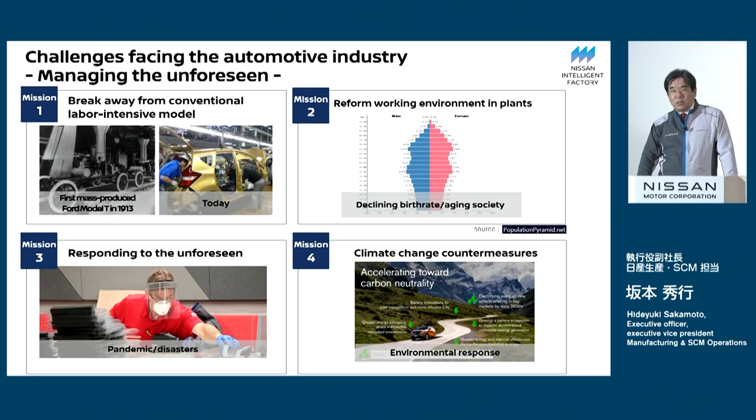And the last one, this is another important global challenge: CO2 emission or carbon neutrality. Fighting climate change is an area where we need to contribute. These are the conditions, and after we satisfy these four conditions, next page please.

We need to build our car production scheme for the next generation, adapted to the future: electrification, vehicle intelligence, and connectivity. Building cars is growing more complex and advanced. We are writing a lot of software all at the same time, doing calibration of different sensors, self-diagnosis, and fail-safe systems. These are the assurances we are providing. So car building is becoming even more complex and challenging.

If you look at batteries, big batteries with long autonomy, standard batteries, vehicle intelligence, hands-off sophisticated autonomous driving technologies, or standard driver assist technology like ADAS, there are different combinations of variations required to build cars. So in order to build more advanced and complex vehicles, we need to make the production scheme and production engineering more flexible. This will be the key success factor for Nissan in the future.

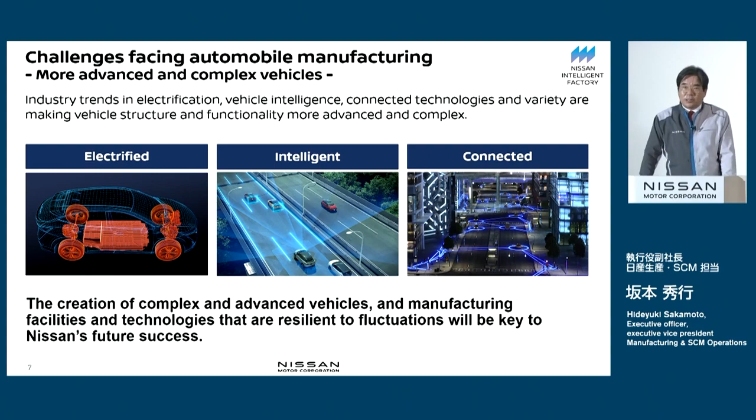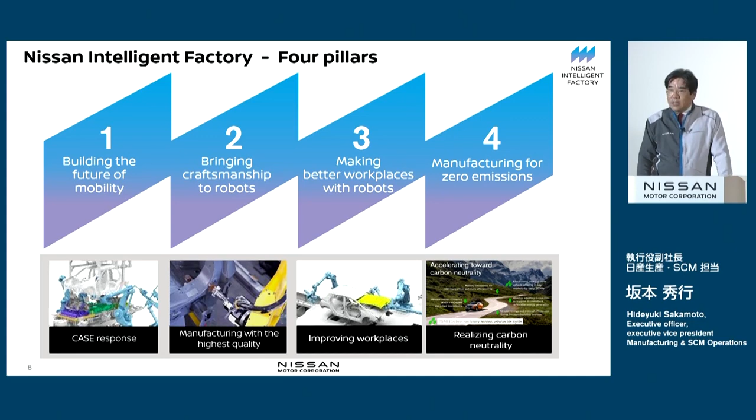That is why we have been creating this Nissan Intelligent Factory. These are the four pillars. Today, I will show you around the shop floor to provide you with the details. Next page, please.

In the introduction, carbon neutrality initiatives are what I would like to touch upon, which I had less opportunity to talk about in the past. Then we'll talk about the technological elements of Nissan Intelligent Factory, and Kikuchi-san will talk about the overview of the plant itself. Next page, please.

Carbon neutrality. Next page, please. Well, this is self-explanatory. Around the world, we are seeing global trends related to climate change. Many agreements and declarations are made. The Japanese government too declared to hit carbon neutrality by 2050.

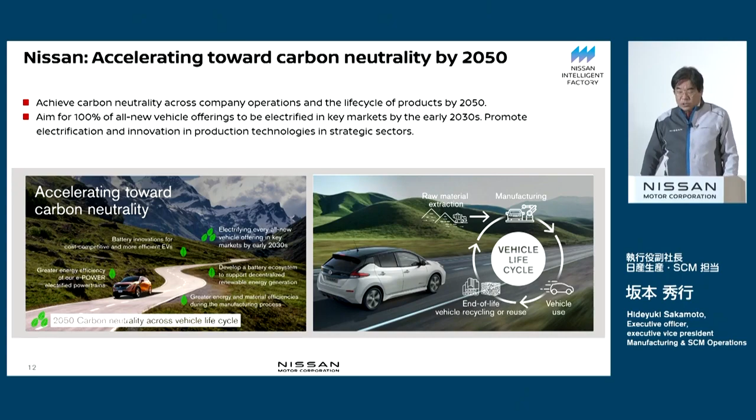Having said that, carbon neutrality initiatives are nothing new for us. We have been working on the Nissan Green Program to reduce CO2 emissions ahead of many people. In this Nissan Green Program in 2010, more than 10 years ago, the first generation mass-produced Nissan Leaf EV was introduced.

In the main market, the main category or main segment of the market, a C-segment hatchback mass-produced EV was introduced, offering an EV you can use every day. I was in charge of engineering at the time as a division general manager. Then we came up with e-Power.

This is about providing electric driving to help penetrate electrification in the market. That was why we introduced e-Power. At the time, I was heading the engineering and was fully involved in the development of this piece of technology. In order to build these electrified vehicles, by minimizing the consumption of energy, we minimize CO2 emissions. That's what we have been doing.

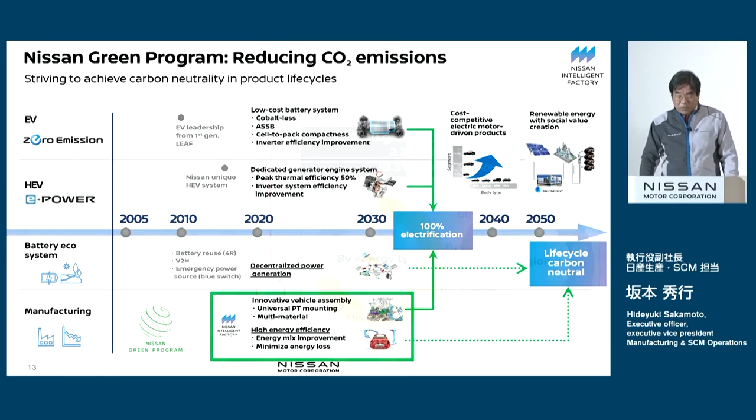And going forward, we are going to promote innovations to do more on this front. Nissan Green Program is about the CO2 emissions in manufacturing operations. How much have we reduced CO2 emissions? For long years we have been working on this, starting from 2005 to 2019. In order to build one car, we reduced 30% of the CO2 emission.

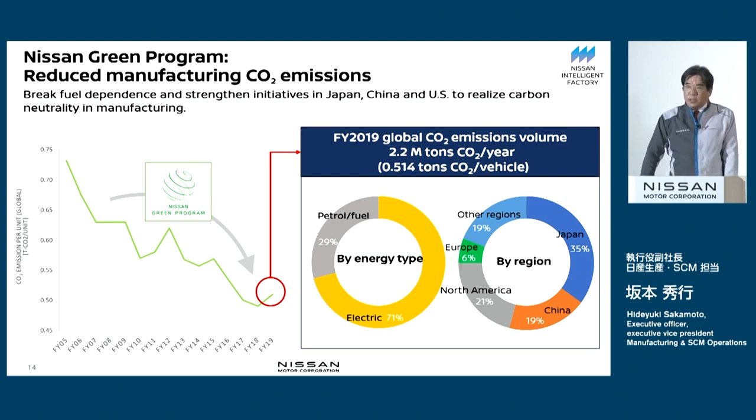This is already a track record. This is a result. As of today, 70% of energy consumed is electricity and gas, with fuel being the light oil, accounting for about 29%. We are going to nullify this consumption at the end of the day, and that's the mission of the manufacturing team.

Here you see how we are going to promote initiatives up till 2050, and this is the roadmap we created. In 2019, as of today, at the plant we have electricity. We use a compressor with high pressure air, shown as the blue line, to provide high pressure air to the plant. And for gas, we use a boiler to evaporate it into steam. This is how we operate the plant today.

In 2030, what will happen? We will largely reduce energy consumption. And on top of this, shown in pink, within the campus we plan green energy, carbon neutral power generation, where we plan to use the fuel cell. We would like to generate power with fuel cells and use green energy such as photovoltaic power generation and windmills. We will combine the renewable energies and expand the scope of the trial.

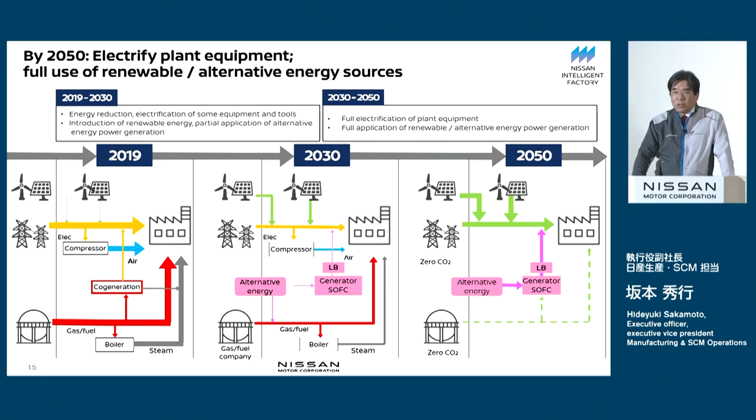Between 2030 and 2050, the basic production process of production equipment should be electrified, and the source of energy will be shifted to renewable energy and clean energy power generation. That's our aim. Next page, please.

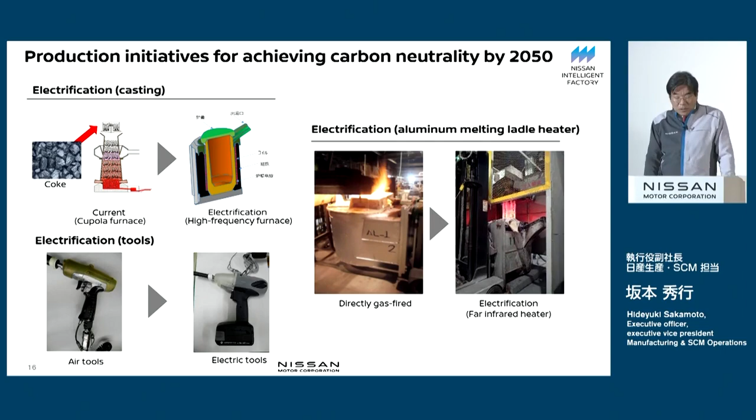As of today, at the UK Sunderland plant, we use wind power and solar power to generate a lot of electricity. And the other day, as we announced, a microgrid has been created, and clean energy will be applied to a wide area.

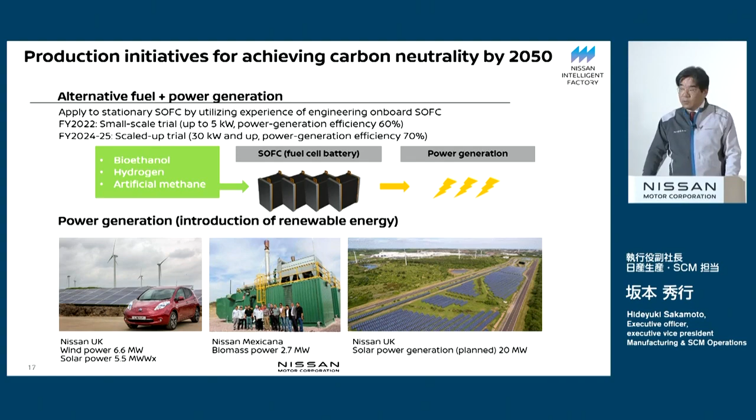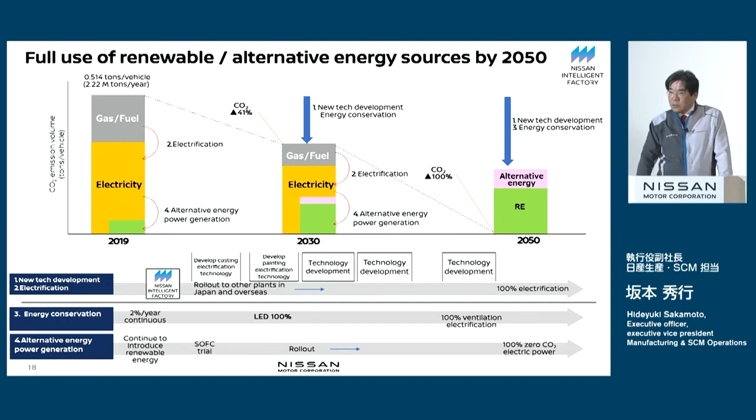This carbon neutral power generation, along with green energy procurement from outside, and fully electrified energy, will all be used in 2050. We will be fully carbon neutral. That's our intent. Based on this detailed roadmap, the R&D and production engineering teams are working to make it a reality. Moving on to the next one. That was all from me.

I touched upon the carbon neutrality initiatives. Next is about the Nissan Intelligent Factory system components and the new technologies that are used. CVP Hirata-san, in charge of this engineering, will be speaking. Thank you for your attention.

Good morning, ladies and gentlemen. I'm in charge of vehicle production engineering. My name is Hirata, nice to meet you. Let me take this opportunity to talk about how we will build cars for the next generation with Nissan Intelligent Factory, and show you how the cars will change over time. Excuse me, let me take off my mask. And how the production line will be updated with new technologies.

I will specifically show you photos of the equipment used in this Nissan Intelligent Factory. On the 28th of November 2019, Nissan Intelligent Factory Tochigi was used as a pilot, and we are going to deploy it globally - that's what we announced. This Nissan Intelligent Factory in Tochigi will be producing the next generation battery EV, the Nissan Ariya.

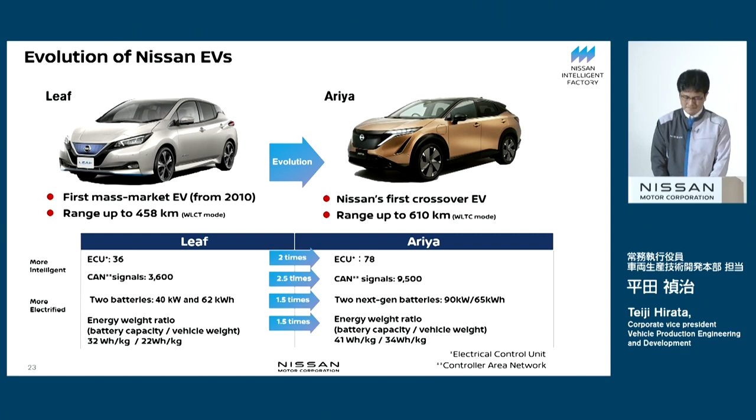On top of this, it's more intelligent and more electrified. The number of ECU, electrical control unit, is double the number of first generation Nissan Leaf, and the number of signals is 2.5 times. Two types of battery have an output, and the energy weight ratio is 1.5 times, so it's largely updated from the Nissan Leaf.

Now, let me talk about the 4 pillars of Nissan Intelligent Factory from the 3 perspectives by providing specific examples of technology. One is Nissan's DNA in the all-new Ariya.

This is Nissan's DNA in the all-new Ariya. We newly developed a platform for EV, and thanks to the platform, we have outstanding quietness and lounge-like interior, stylish and low center of gravity with high visibility, which are very functional. Four types of powertrain, a wide color variation, and highly intelligent electric control unit are the representative examples of Nissan's DNA in Ariya.

Now, in order to make this a reality, what kind of production technology did we use? One is SUMO, the simultaneous underfloor mounting operation. With one equipment, we can build multiple powertrain components in a batch mounted from one single pallet.

Today, we have several processes with labor-intensive work. As you can see, the operators have to work in such a hard position, and we fully automate this universal mounting in a single process.

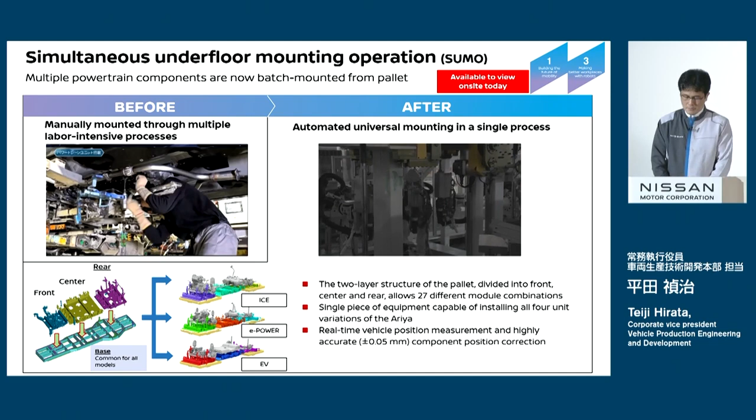The real-time vehicle position measurement enables a highly accurate component position correction. This big and heavy powertrain unit is mounted in a single process, and we call it SUMO, simultaneous underfloor mounting operation.

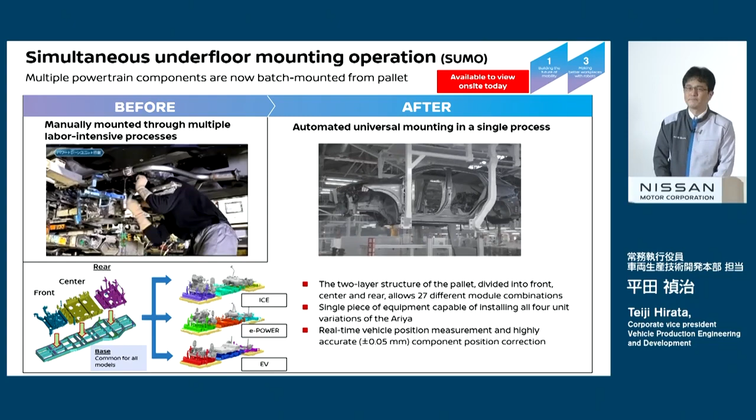Next is the automated tightening and alignment of suspension links. Here again, it used to consist of several processes with manual operation, which was high workload. It was complex and required high skills. But here again, we introduce a single process with automated alignment adjustment.

High load work requiring high torque tightening has been fully automated. An adjustment by robot with an accuracy of 0.1 degree ensures alignment that exceeds the Takumi Master Craftsman precision. As a result, driving comfort and stability are ensured on the EVs that we produce.

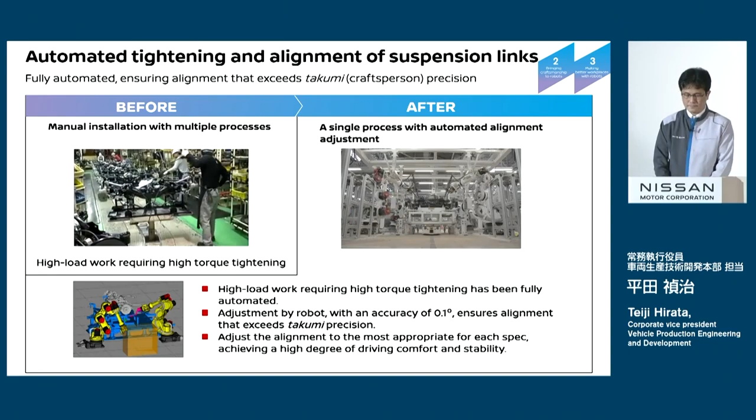Next is automation of headliner installation. Headliner is the component on the ceiling of the car. In the past, operators had to come into the cabin to install the headliner, so it was very hard to do this. With the vehicle intelligence and connectivity devices added, the weight increased by 4 kilograms from the traditional car. This installation is now fully automated by robots.

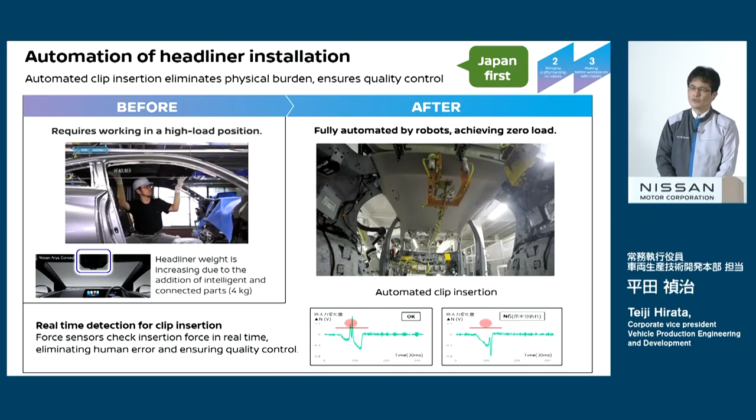This component is not tightened with a bolt. We insert a clip instead. Today, operators have to check that the clips are inserted fully using their fingers to feel it. But we added a sensor on the robot so that on a real-time basis, we can monitor the status, and once the clip is inserted fully, the work is complete.

Next is the automated cockpit module installation. Here again, we used to have 2 Takumi operators controlling the variations and left and right differences in this installation process. In the new process, we reproduce these high skills of Takumi master craftsmanship in robots. A high-speed vision system precisely measures dimensions, calculates the optimal center point in real time, and assembles the cockpit module for a well-proportioned and seamless cockpit.

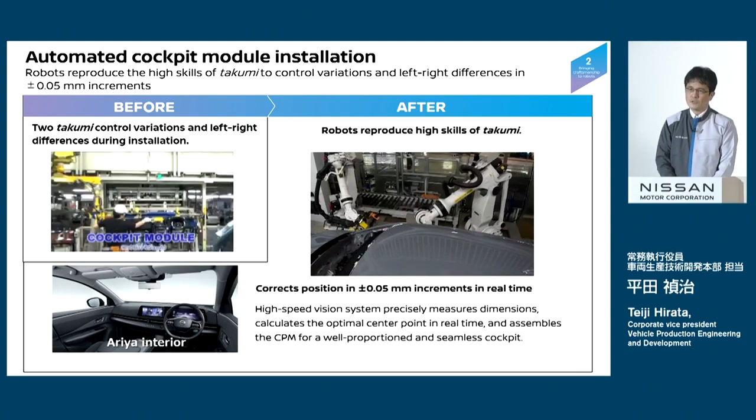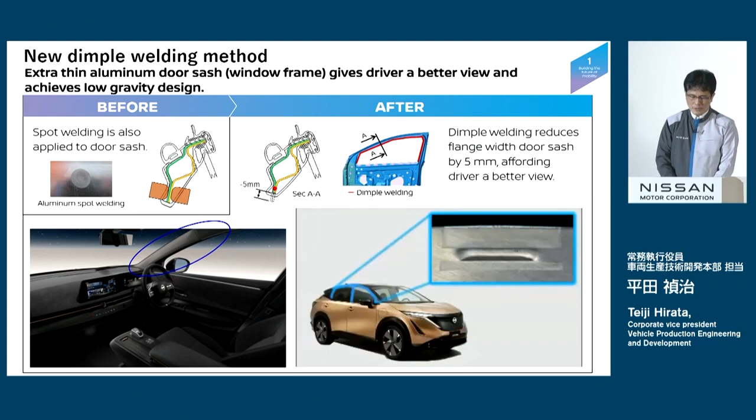Next is the new dimple welding method. All-new Ariya uses an aluminum-made door. In the traditional aluminum door, the door sash requires spot welding like a steel door. However, the area of the electrode should be added on the panel to make this happen.

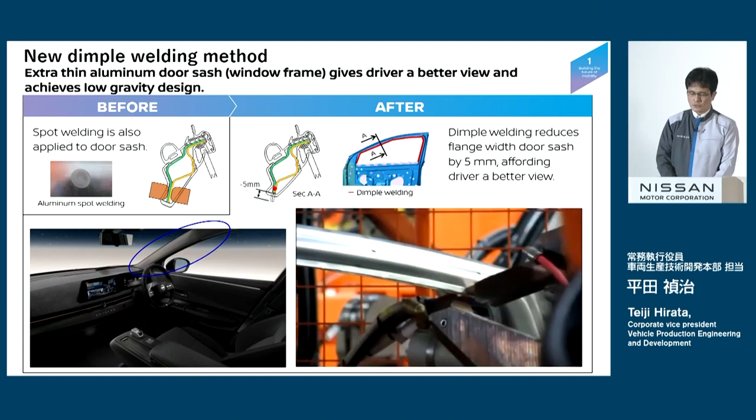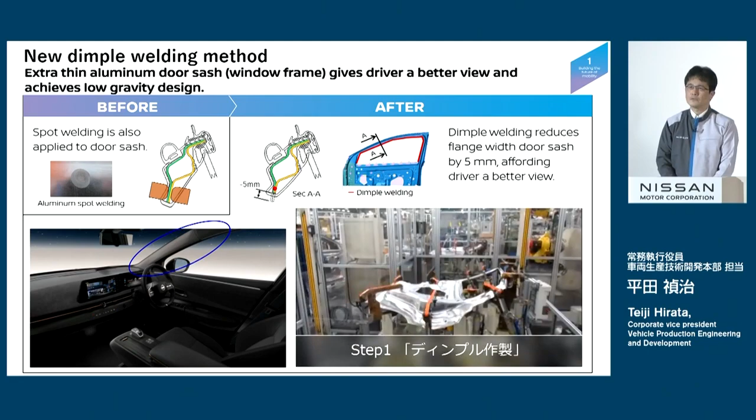But by applying this new dimple, which is a thin dimple that is stamped, the electrodes can be made smaller in size. As a result, we can reduce the front pillar width by 5 millimeters and increase the visibility for the driver.

Next is electrical systems responding to increasing vehicle intelligence. As Sakamoto-san mentioned earlier, depending on the specifications of the cars, we write the software at the plant for the ECU. The number of units largely increased from the traditional car in all-new Ariya, and the volume of data to be written is much larger than the traditional car.

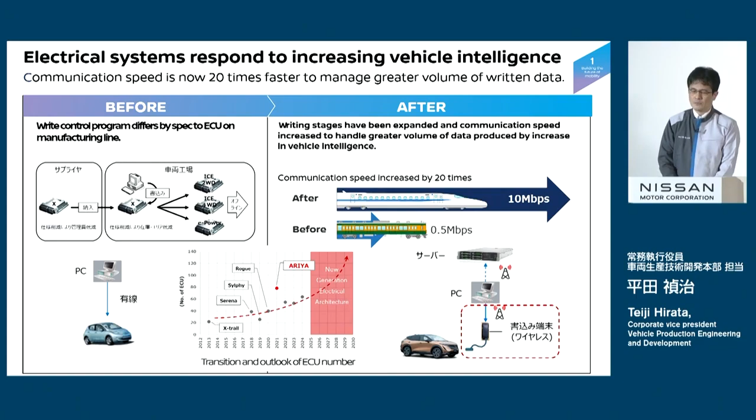In order to respond to this, we introduced a communication speed which is 20 times faster. And today you do the communication with the wire system, but now we are applying the wireless device instead.

Next is the core of the EV, the motor production process. In the traditional EV and e-power motor, we use rare earth materials, a permanent magnet inserted in the rotor. But with the all-new Ariya, this is the first mass production vehicle where we use an 8-pole wound field synchronous motor. To mass produce this wound field motor, high speed, high precision, and high density winding technology is required.

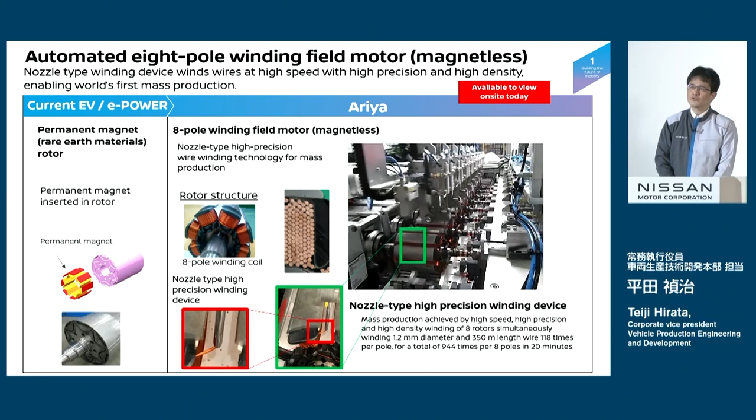Like the needle of an injection, there is a 1.2 millimeter, 350 meter coil. It is wound 118 times per pole, for a total of 944 times per 8 poles, in 20 minutes. That's the equipment that we introduced.

Next is automated paint inspection. Today, in the paint shop, we detect foreign objects on the surface with human eyes. But by using image processing equipment, in addition to the foreign objects we identify, we also identify 6 other faults which were unseen with human eyes.

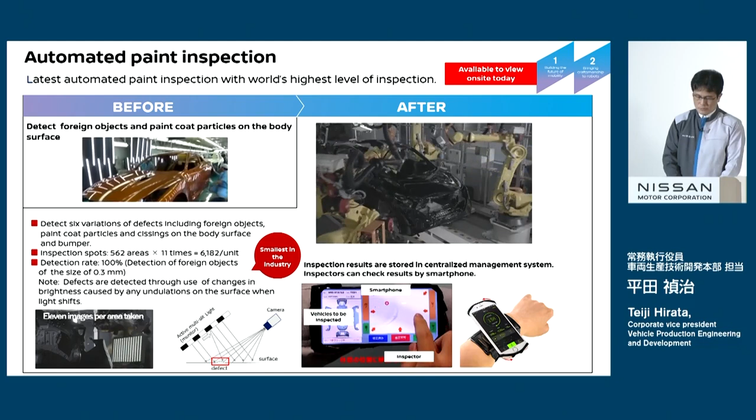As you can see on the bottom left, an LED light slit is reflected on the surface of the vehicle, and by shifting this light, we see the undulations of the light and the differences in brightness. So we can see the undulations or unevenness on the surface to identify faults unseen by human eyes. Compared with the traditional scheme, we can detect foreign objects of 0.3 millimeters in size, which is the most precise in the industry.

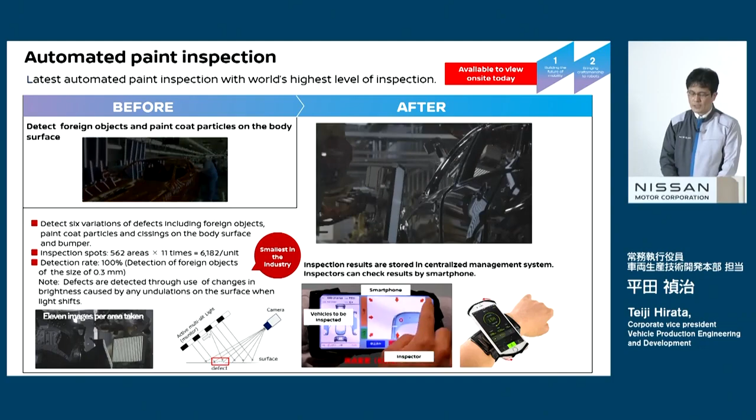The findings of the inspection are stored at the centralized control center, and the operators can find this fault using a wearable device where he can see this data.

Next is the integrated automated inspection system. Just like the paint shop today, we rely on human beings to assure quality, and operators need to keep concentration. To this end, we rotate them in different positions so they can maintain their concentration.

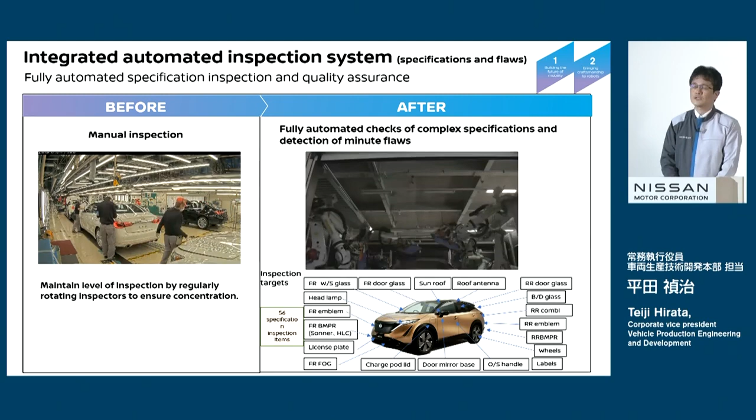Just like the paint shop, we introduced the same image processing technology to inspect complex specifications and detect minute flaws. For Europe, North America, and Japan, depending on the destination, there are differences in specifications, so 56 items are inspected in full automation.

Next is about our initiatives and contribution to carbon neutrality, starting with the world's first integrated painting and baking of bodies and bumpers. Traditionally, we baked and painted bumpers and bodies separately because they use different materials and require different temperatures.

We jointly developed the world's first water-based paint coating, which can cure at low temperature. As a result, we can paint and bake the bodies and bumpers at the same time. We used to bake the body at 140 degrees Celsius, but now we can bake at 85 degrees Celsius, like the bumper.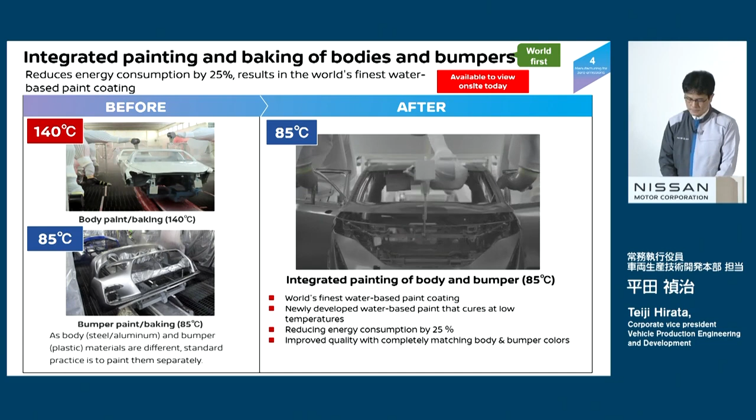As a result, we have the world's finest water-based paint coating and reduce energy consumption by 25%, which is another big contribution to energy saving. And because we are painting and baking the bodies and bumpers together, we improve quality with better color matching. Next is the dry paint booth.

Traditionally, we extracted the paint paste, which we call paint mist or paint waste, by using water to collect it. So the humidity in the paint booth increased, and we were unable to efficiently circulate the air within the booth, and we had to discard the paint waste that we collected.

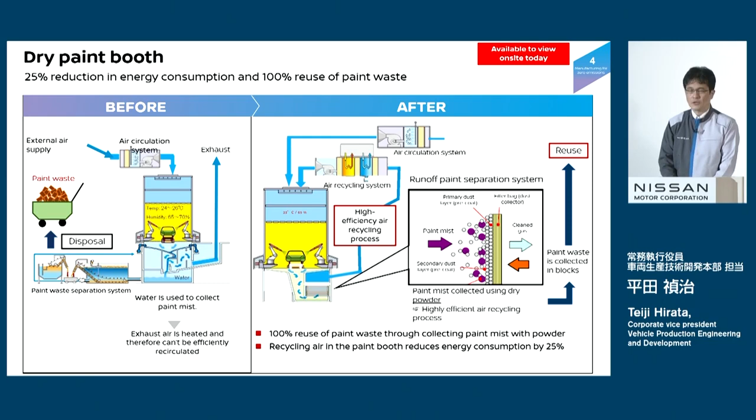By using dry powder, we collect the paint mist without increasing the humidity within the paint booth, so we can recycle the air in the booth efficiently. This paint waste is put into a block, and we are reusing it, or trying to reuse it eventually.

Next is power generation with alternative fuel. This was already explained by Sakamoto-san. We are utilizing electricity generated by on-site fuel cells. From the latter half of 2022, we will conduct a field test of this fuel cell, and by 2030 we would like to fully apply it. To this end, we are developing the technology.

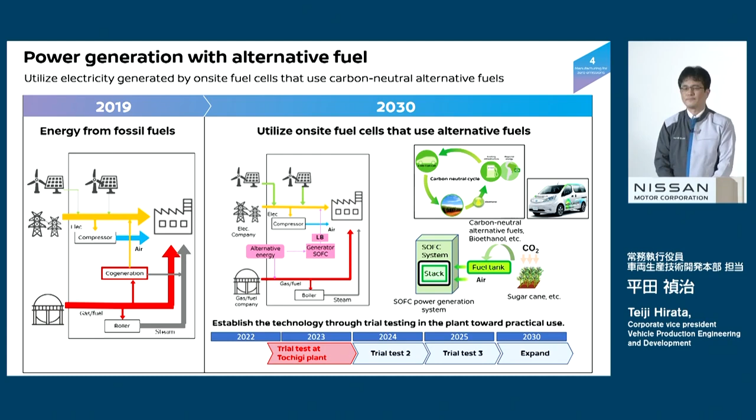Next is about the digitalization of manufacturing.

Starting with quality assurance by establishing quality gates, automatic inspection in the paint booth. Besides this, we have quality assurance systems in other processes. We use the same network and the same platform to centralize control so that we can automatically take records of the inspection and ensure traceability, or increase the traceability.

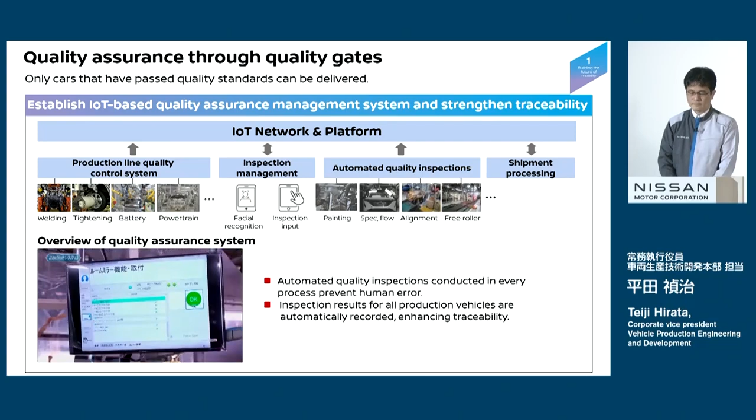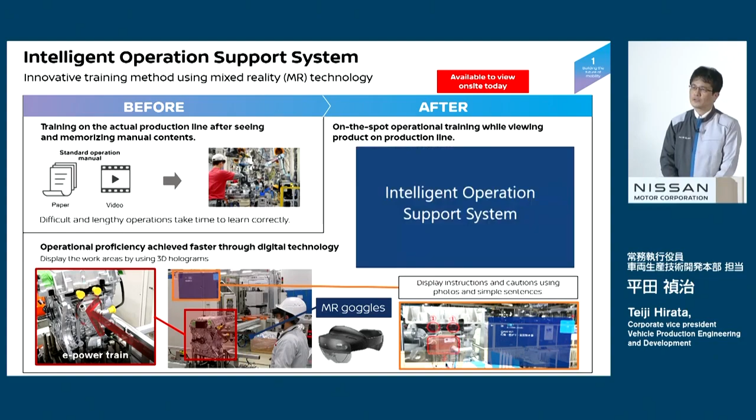Next is the intelligent operation support system. By using MR technology, we provide good training to operators. We used to use textbooks and video and let them do on-the-job training, but when it comes to a complex and long process, it takes time to learn the skills. But we are using MR goggles, applying a hologram, and by using text and manuals we provide caution points and what to do. So by being there at the line operation, we can develop and train the operators. As a result, we can largely reduce the lead time to train skilled workers.

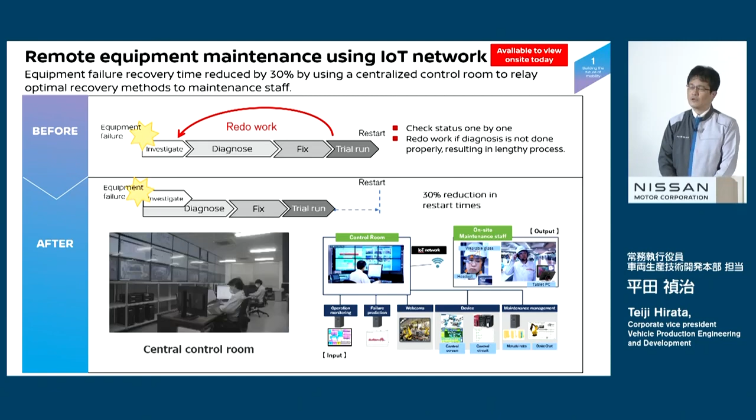Next is remote equipment maintenance using IoT network. The data and materials to fix the equipment are secured in the central control center, where skilled maintenance workers are stationed. These veteran, experienced experts are connected to the operators in the line operation through a network. So when the equipment breaks down, this expert provides hints and the best way to fix it so that we can reduce the lead time by which we restore the equipment.

And the last page: this is how, in addition to shorter recovery time, we are applying predictive and preventive equipment maintenance before the failure happens. By applying condition-based maintenance diagnostic technology, we apply logic and thresholds automatically to prevent failure. And thanks to IoT, we are monitoring the equipment at all times, and by using AI, we identify signs of faults or failure and minimize production loss.

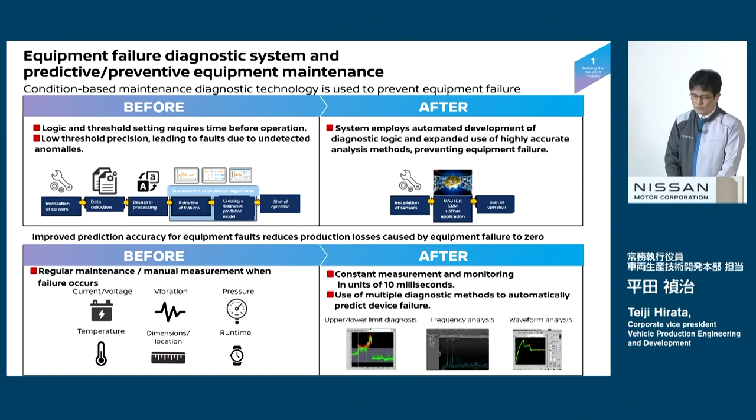These are many examples of the technology, and some of them will be shown to you during the plant tour later. That concludes my presentation. Thank you for your kind attention.

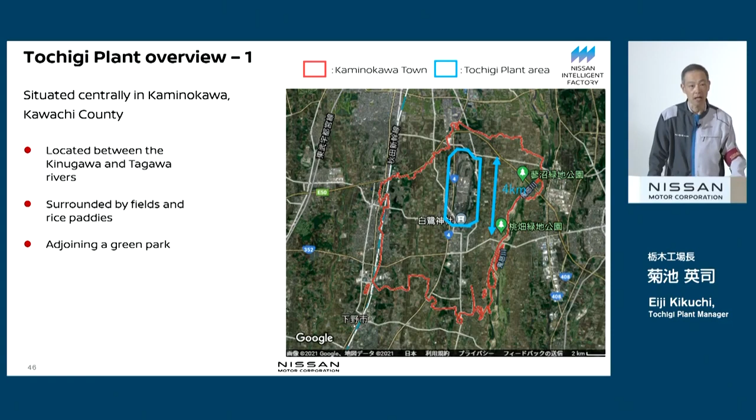Our plant is located at the center of Kaminokawa town. 4 kilometers is the width of this land, and around this campus we have the Kinugawa and Tagawa rivers. As you can see, the campus is surrounded by greenery. This is where we are located.

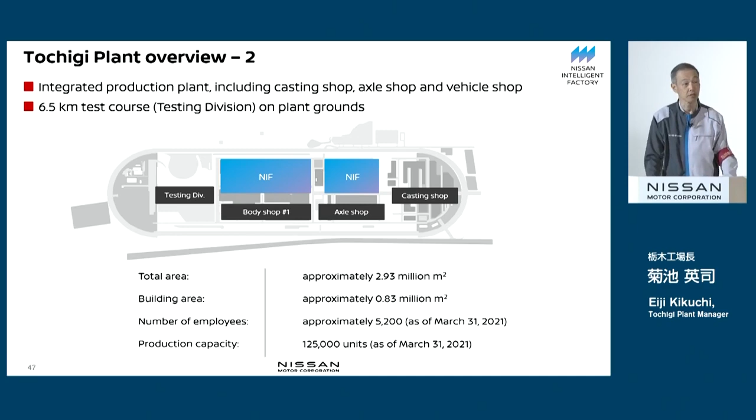As we run our operation, we value coexistence with the local communities. Around this plant, there are a lot of greeneries and a lot of biodiversity, and we are protecting the ecosystems around our campus. In this, especially, we are putting a lot of effort into the quality of water, controlling the quality of water.

In Nissan Intelligent Factory, as Hirata-san mentioned earlier, the new paint shop does not require water. In other words, there's no wastewater. Other industrial waste which may be emitted from the rest of the processes is cleaned before it goes out, and we are monitoring this waste 24 hours around the clock. By using this processed water, we have a river created within this campus.

This fiscal year, on the 1st of April, my first job was to put fireflies in this river. This summer, these fireflies grew up and were illuminating at night. Unfortunately, today you cannot see it, but this is one of the initiatives to enhance the quality of water, and this is one of our top priorities.

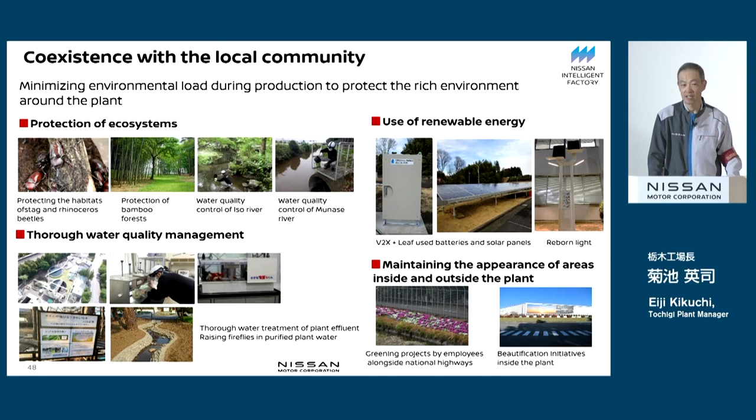That concludes my presentation. Thank you for your attention. Thank you very much, that was Mr. Kikuchi. So with this, that completes the presentation on the Nissan Intelligent Factory initiative. Thank you for your kind attention, and thank you for listening to our presentation.